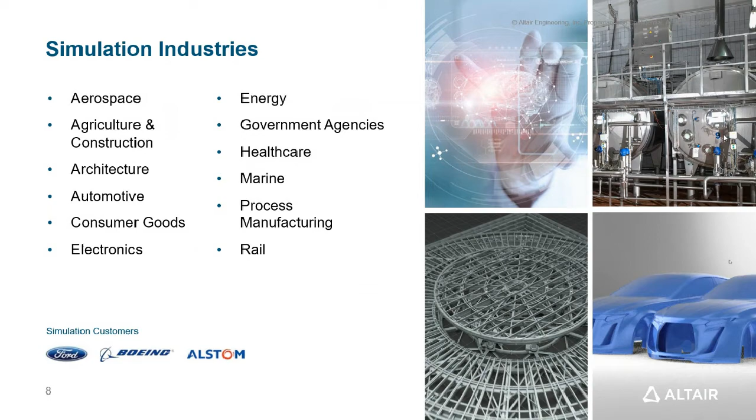In terms of the industries that we're in, again, aerospace, architecture, automotive, making full use of our software. And it means that whatever discipline you're interested in at university, there will be an industry out there that would be of interest to you. In terms of the applications, key ones here for you being structures, implicit and explicit, systems modeling, multi-physics, industrial design, fluids and thermal and electromagnetics may be key to some of the technologies you would wish to access.

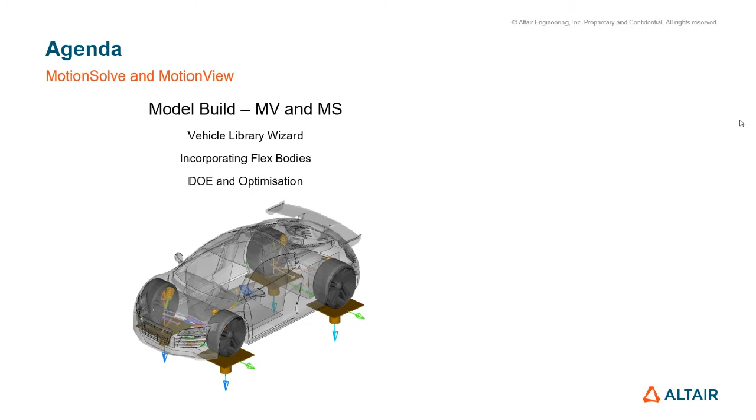So we'll do it in two parts. We'll go through the model build itself, using MotionView and MotionSolve, where I'll take you through the vehicle library wizard and flex bodies. And then I'll also take you through Inspire Motion, where you can do a rapid analysis of how you can connect all your different parts together, and then how you can take your multi-body dynamic analysis straight into a topology optimization. So how we can conduct an optimization based upon how our parts are being used.

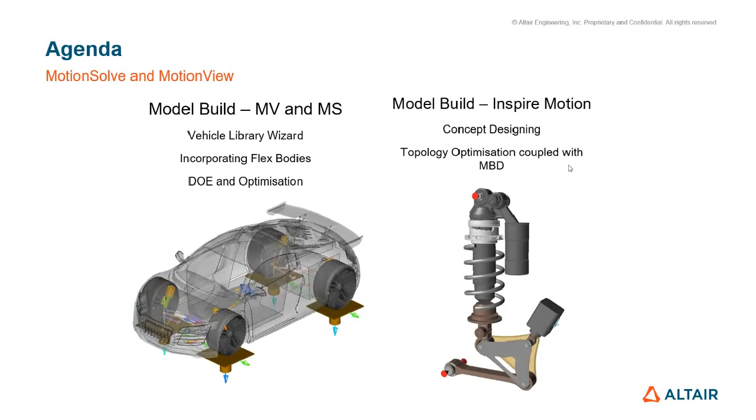I'm not too sure what everyone's CAE background is. Some of you might have used FEA before, some of you probably never encountered this before. So we'll go through exactly why it is that we should use MBD. Within CAE workflows, we have three main routes that you can go down. We can use simulation to emulate real life scenarios. This is where we understand how our product is being used, and we want to design for its intended purposes.

The second way is we can emulate physical tests. For example, if you're going to be producing a car that's roadworthy, we need to make sure that it's also crash-worthy. And in order to make sure that it fulfills these standards, it needs to be able to pass physical tests. So this is where we can start designing to make sure that we can replicate standardizations and the different testing procedures.

And finally, last but not least, at times where we don't really know how it's being used in real life, because maybe it's part of a huge assembly, or where we're not trying to replicate a physical test, this is when we can start looking at a multi-body dynamic analysis. MBD basically helps you look at mechanisms within your parts. So if you're looking at an assembly, you can do a mechanism-derived analysis, and you can also look at your part assembly performance.

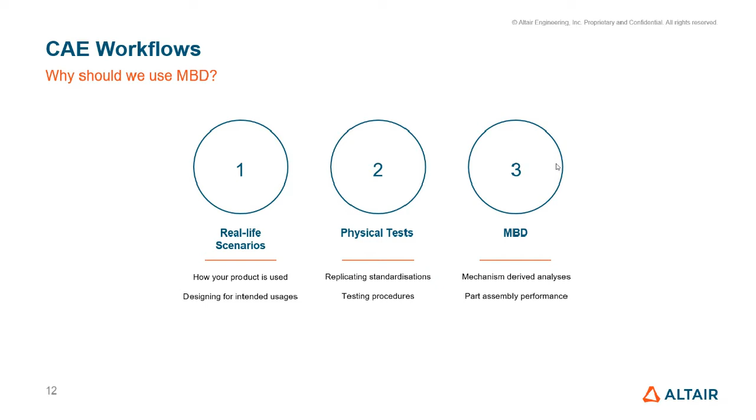If it's a standalone product, obviously you understand exactly how it's being used. But say if it's a lower control arm from a suspension system, you probably want to know exactly where the attachment points should be and the strength that it's undergoing when being used.

So just a little bit about the two products that I'll be introducing. Within the first demo, I take you through MotionView. MotionView is the preprocessor, the place where you would set your model up. It's the GUI which you would interact with and where you would bring your CAD in to work upon. The same with Inspire Motion. Inspire Motion is a second GUI that you can also work with, and based upon what you're looking at, you can choose whether you want to use MotionView or Inspire Motion.

Now, just because they're two different interfaces, it doesn't mean that they would solve differently. Because what's actually being run in the background is our solver called MotionSolve. You don't have any sort of interaction with it. It's the massive calculator in the background that does all of the simulation work for you, all the calculations after you've set it up.

Hence, even though they look slightly different, or Inspire Motion is slightly easier to use than MotionView, this by no means means the results you get are less accurate. It's just as accurate as our full-blown, complex MotionSolve solver that's used for MotionView setups as well.

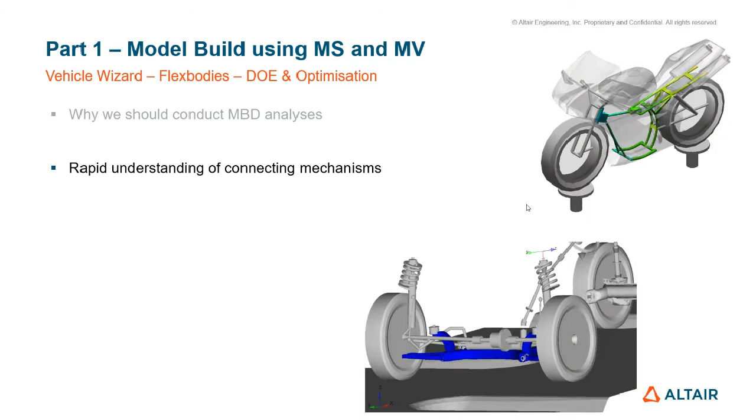So let's start with MotionView and MotionSolve. We've just discussed why we should conduct an MBD analysis. We will understand the connecting mechanisms of our different vehicles, so I'll walk you through the library wizard itself. How MotionView is different to our other products is that you can make it as simple as you like, but you can make it as complex as you need it to be as well.

So from simple to complex functionalities, either you can make it a simple model, or you can make it fully parametric, where if you were to change one value, all of your other model setup will update itself with respect to that change that you made within the parametric model.

For those of you who already use HyperMesh, you'll be able to see that there is a seamless transition between HyperMesh and MotionView, where you can take one mesh model and just bring it straight into MotionView. So this enables a really nice way for your FEA teams to work with your MBD teams, and there's an ease of organizing different system entities.

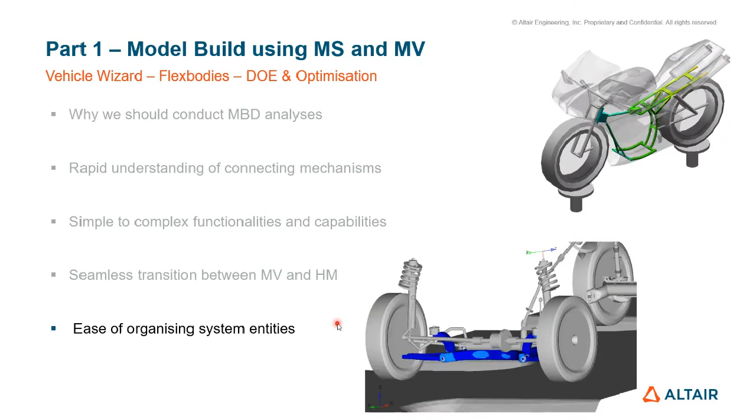So without further ado, I'm going to bring up my screen. Within this demo, what I'm going to do is show you exactly how you can access the assembly wizard, how you can build full vehicles, or maybe just the front end or the rear end of your vehicle, and then how you can take it through to specifying and understanding how all your joints work and the forces generated from them.

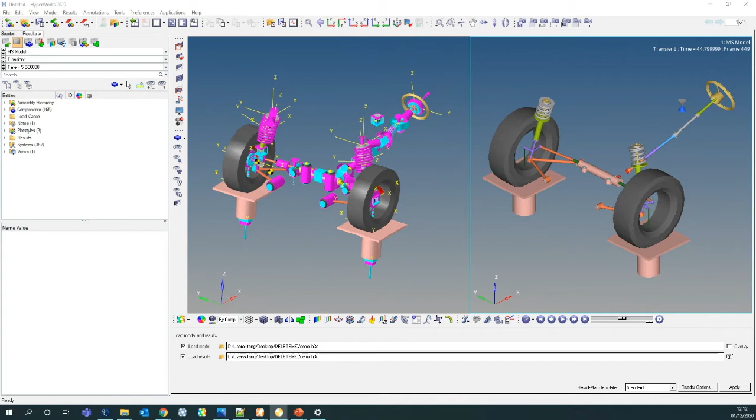So when you start up MotionView, you will see that it looks a bit like this. Let me pull the right window in. For those of you who already use HyperMesh, you'll see it's quite similar in that it's got the same sort of setup, and you have a project browser at the side here. You have another taskbar of your different options, and also you have your actual menu icons at the top.

Now, because it's multidisciplinary, you have lots of different options that you can load in. So either we can start looking at the attachment wizards, the assembly wizards, and any sort of library wizard that you need to access, you set it here. Just so you know, you aren't just tied to looking at vehicles. You can look at a small truck or a car, a heavy truck, or a two-wheeler. So if you're going to design for a bike, you can easily change your wizard library here. But for today's demo, we're going to just show you the assembly wizard.

So when you click on the assembly wizard, you'll see that you can specify a model type. Say we want to look at the front end of the vehicle, you can then specify the driveline configuration, whether it's a front or rear wheel drive. And then you can select your other primary systems, so the vehicle body, your front subframe, the suspension system itself, what kind of configuration you want it to be. There's 5 different options to choose from. And with steering linkages, you can specify a type and powertrain as well.

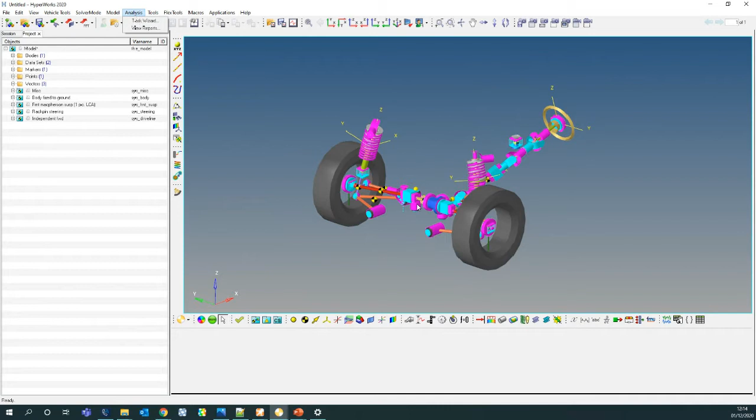Now, straight after this, either you can bring in your own CAD to replace different parts, or you can change the different hard point locations. And like we mentioned before about the well-organized system entities, you can use them from the project browser at the side. You can expand upon them and see which graphics and which bodies belong to which system. Within the suspension system, it refers to the knuckle, the lower control arm, the wheel, and the wheel hub.

And like we said, you can specify the mass and the inertial properties of these parts, exactly the way in which it would move, and the coordinates of it as well. Either you can make it follow a point that you're using, making it fully parametric, or you can enter in the values themselves.

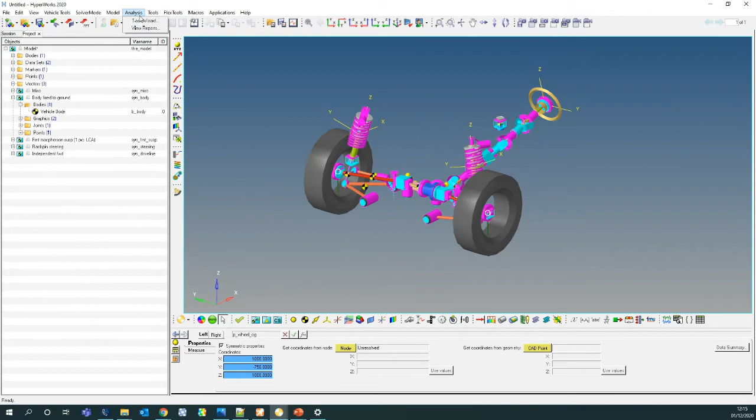Now, once we understand all the different systems that we're working with, you can then attach an analysis. Within MotionView, you have an analysis wizard with the default standard ones that you might want to look at based upon the model that you have loaded in. So you can start looking at a kinematics and compliance analysis, or a steering analysis.

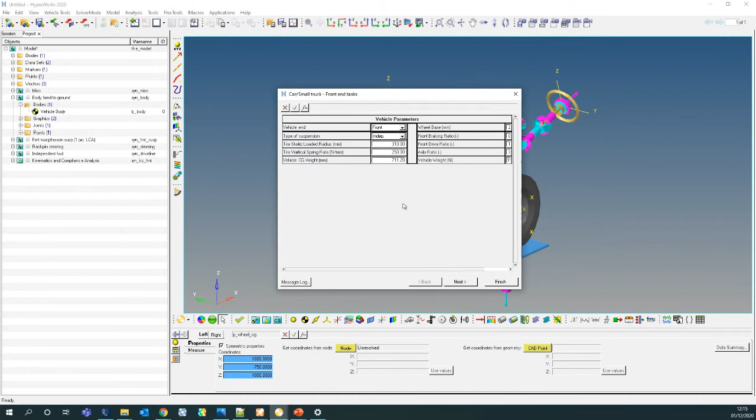What it really cleverly does is it understands where your different hard points are, and you can change your vehicle parameters for the test itself. You can go through and specify your test parameters as well, so the jounce travel and ride, the rebound travel, maximum longitudinal forces - you can change them all within this area.

You can see very quickly within MotionView it understands exactly where those points are and where to attach that test onto. So at this point, what you can do is click run, and I can then save it in the specific folder. So if I was to bring in and save it here, we can call this demo 2 and just click run.

Like with every solver, it will then tell you exactly what's going on, how far it is within the solve, and within a few seconds you can very quickly see the results of this setup. So let's let that run in the background.

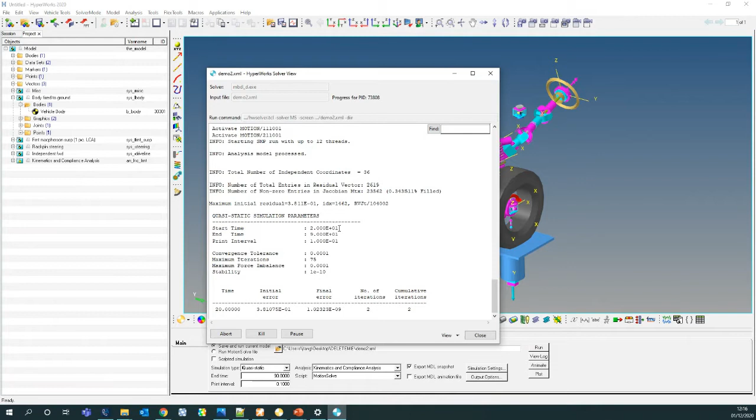Now, if I can start another one to show you, you're not just tied down to looking at the front end of the vehicle. What you can always do is start looking at full vehicles as well. So say if I go into the analysis or the model assembly wizard, we can start looking at integrating a full vehicle with a driver, or you can specify that driveline configuration. For now, I'll leave everything as default, but obviously you can go through and select a driver system as well.

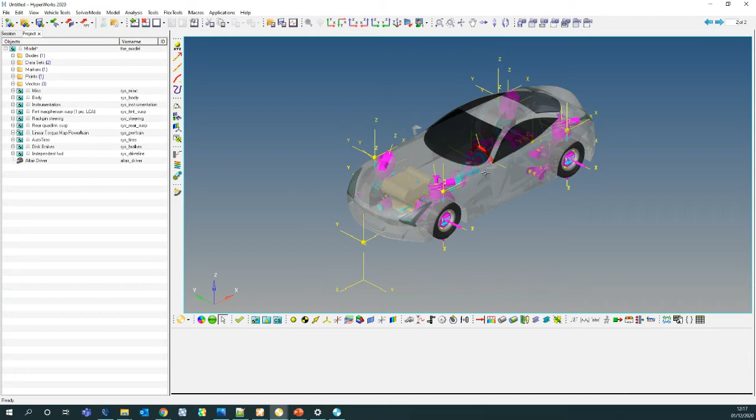And the driver system is awesome because say if you wanted to understand the amount of power or the torque required to go through a certain road in a double lane change, you can easily specify that driver to overcome all of those different parameters.

So you can see here we have a vehicle, and very quickly I can attach another analysis to it, and you can add a different event. So in this term, I can do a double lane change, click OK, and you can see it map out a road for this vehicle to follow.

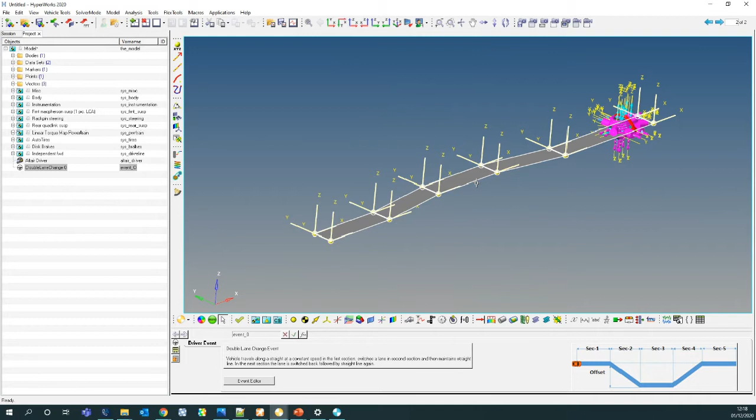Once we have this set up, you can then go through and change your different vehicle parameters to make it more applicable to your vehicle itself. You can change the shell, the CAD, so any sort of CAD graphics that we already have - you can easily click on them and replace it with your own graphics as well. These will be the points where you go through and you can make it refer to a different CAD graphic that you're looking at.

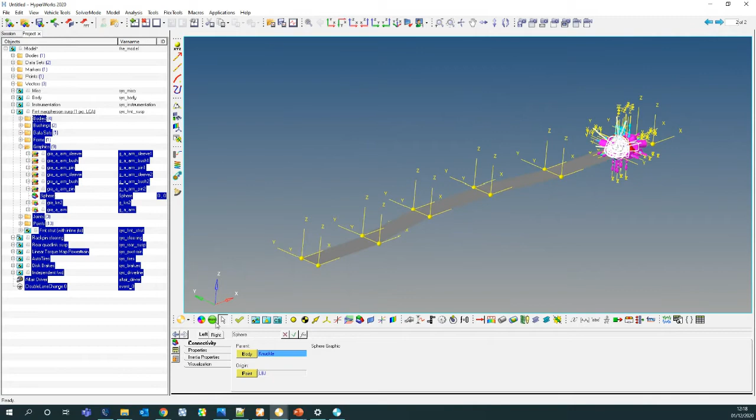So like we said, if I just run this in the background, I can call this car, and let's run it. Now if I can refer back to my previous model, this one's probably solved now - you see it's completed. So what I'm going to do is click animate.

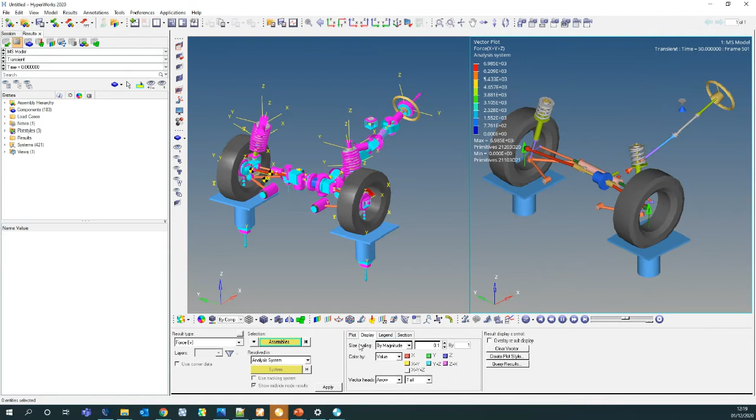And very quickly, you can then do the post-processing on the other side of the screen. If you were to click play, we can go through and specify the forces that we get from the different assemblies. And if we were to change the display, so if we did it by magnitude - there we go. We can see the forces that the car will go through throughout its whole time in travel.

And then the same can be done for this one again, where you can click on animate, and throughout this section, you can see exactly the behaviours in which this car would have to undergo in order to do a double lane change. And obviously through here, you can get all the results you need.

Now, what's really nice is that built into Motion View and MotionSolve is the fact that you always get these reports with it. So with every sort of standard analysis, you can specify it to output the same set of results each time through a report template. So for instance, if I were to head back into this analysis, just by going into View Reports, you can see anything that you solve gets brought up here.

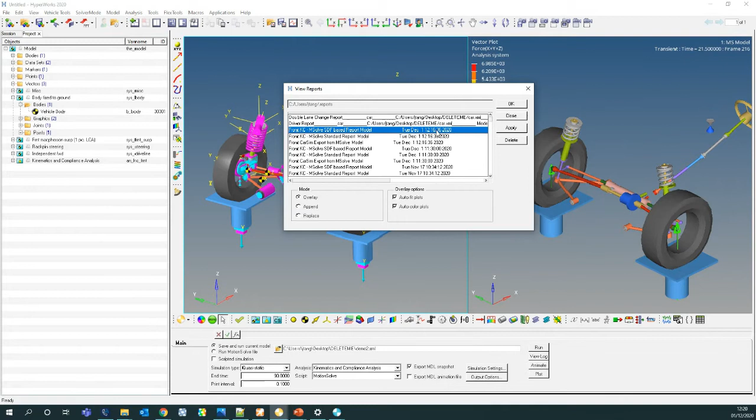Based upon that analysis at 12:16, I can click to load up the standard results, click OK, and you'll see that it brings in all the different viewpoints of the vehicle you might want to focus upon, and also generates all the different graphs for you. Let's give this a second to load, and we can do the same with our car as well.

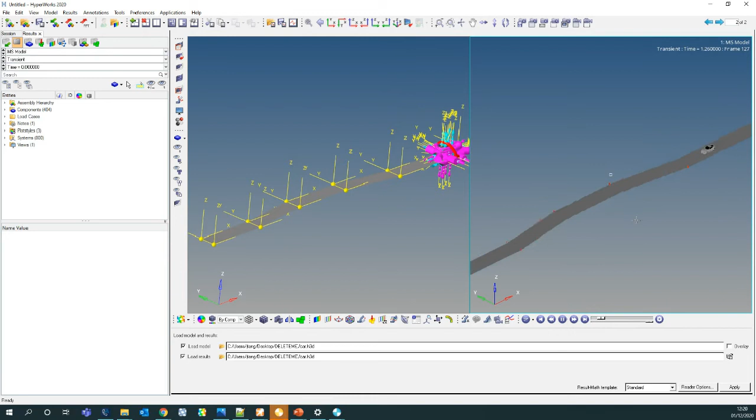Here you can see the car's coming to the end of a double lane change. Say if you wanted to understand the camber or the behaviour of certain aspects in your vehicle, very simply go to analysis, view reports, and we can bring up the double lane change report. If I click OK, now you can see from this K and C analysis, we can go through and look at all of the different graphs.

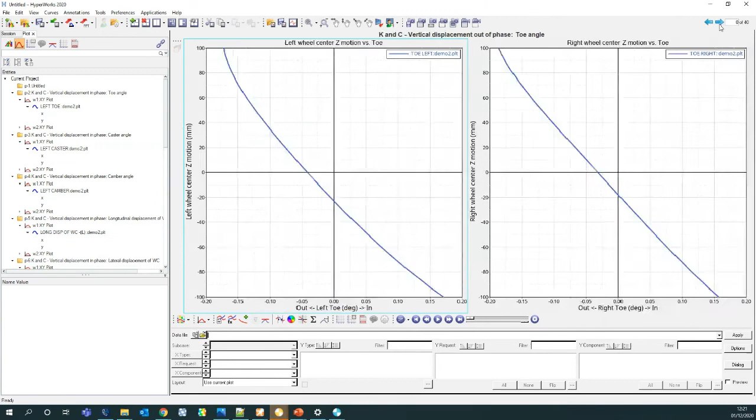You can look at the left wheel center motion versus toe, the vertical displacement in the phase, the toe angle, caster angle, camber angle. You can go through all of this and it will give you everything you need. You can also look at exactly how you might want to optimize it to improve its performance and go through all of it here.

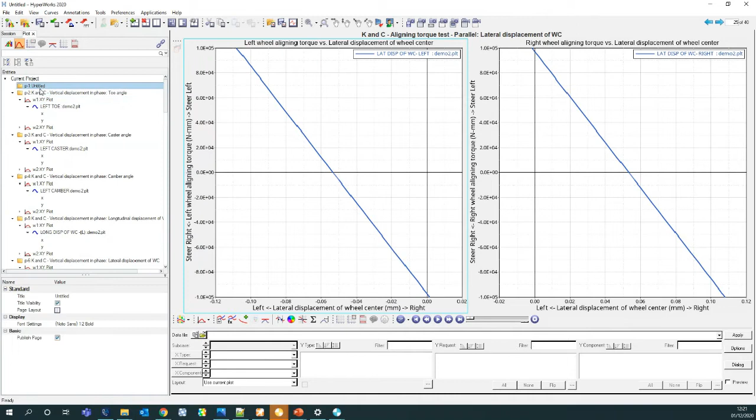Now, once you want to start looking at flex bodies - flex bodies are different to what we would use in Motion View, since Motion View assumes everything's rigid, meaning it won't deform when being used. You would then start incorporating flex bodies into these different parts if you know the force will change because your part will undergo significant deformation. That's when we want to start incorporating flex bodies.

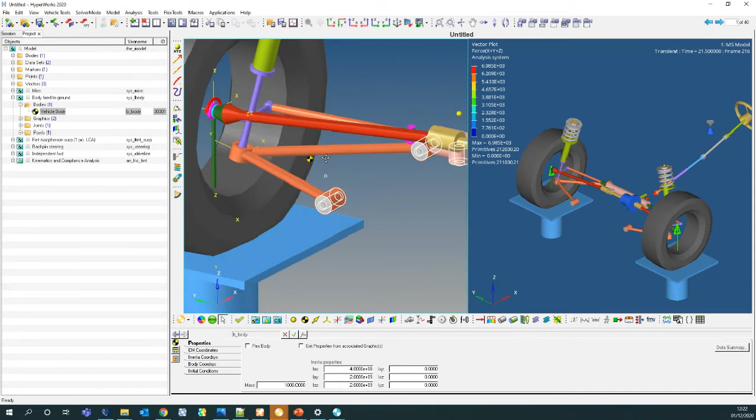Very easily, you can click on flex body and just bring it in. There's lots of tutorials to show you how to do a flex prep. It's very easy to use.

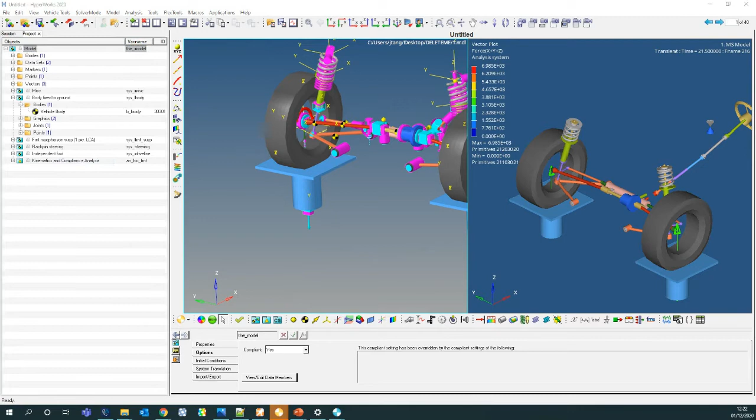One more thing I wanted to show you is that for anything you're looking at, if you right click in model, you also get the optimization wizard. Let me just save this first. If I save this as a model, I should be able to show you how you can use the optimization wizard.

With the optimization wizard, if you wanted to change the hard point of your suspension systems, you can go through and specify exactly what it is you want to change. You can do all of these and just click add. Obviously if they're parametric, you have to make sure they're not parametric, but this is where you can go through to specify what it is you want to change.

You can look at the nominal values, so where it's currently sat at, and optimize it for different values. You can optimize based upon its performance and take it through for an optimization itself. There's another tutorial online for this, which you can easily refer to.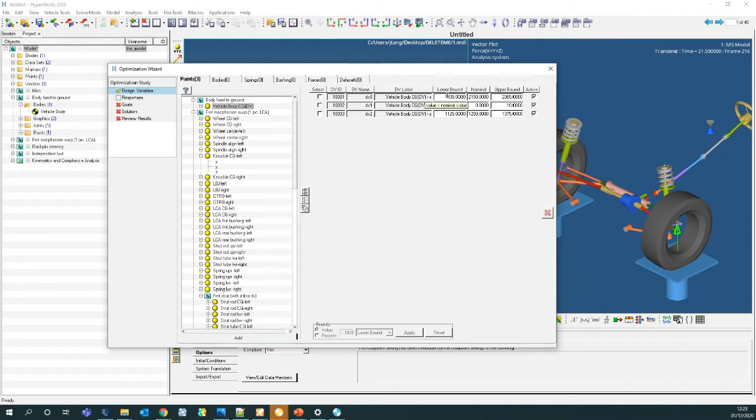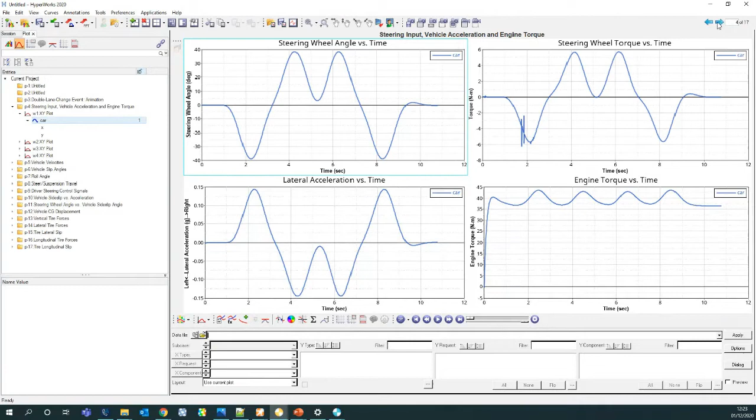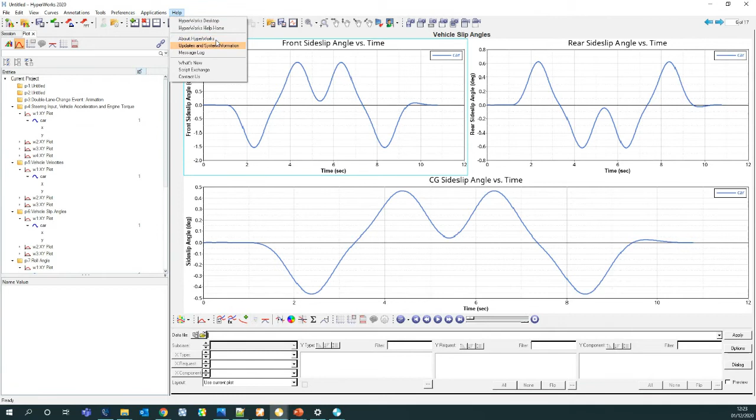But yes, this is Motion View. In a nutshell, I've only covered just a few of the many complex functionalities it can do, but do give this a go. There's lots of tutorials online - if you go to help and go to help home, there's lots of tutorials in there which will show you exactly how you can go through and use this tool to design your FS vehicle.

So if I can head back into my slides.

But obviously with MotionSolve itself, it's capable of creating fully parametric models. This is where you want to use MotionSolve if you want to look at full vehicles and specialize on using flex bodies - then this is when you want to use Motion View. You can use it to predict your dynamic and kinematic responses.

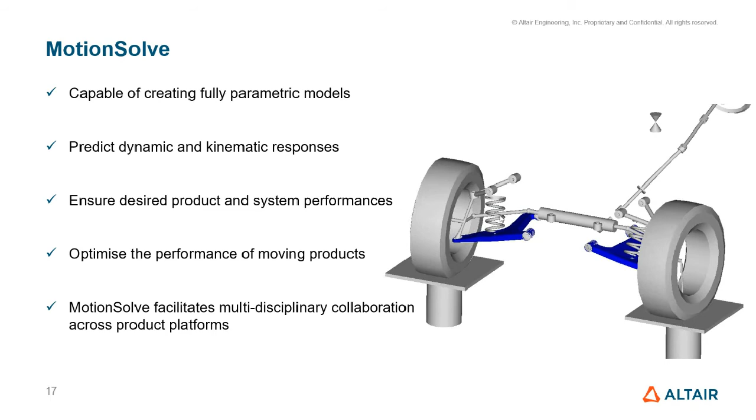You can ensure that your desired product and system performances are met using the optimization wizard, and with the optimization wizard you would optimize the performance of your moving products. MotionSolve itself also facilitates multidisciplinary collaboration across product platforms - so say if you wanted to couple this solver up to your CFD as well, you can easily do that with all of our suite of tools.

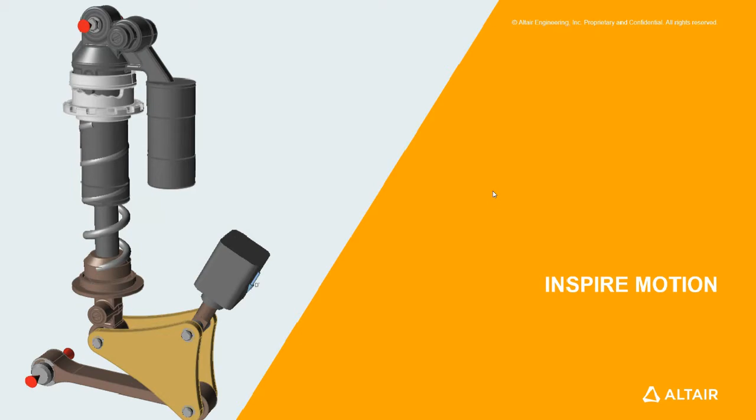Now for the next few minutes, I'm going to show you Inspire Motion. This is a tutorial you can do online as well. I've recorded a video for all of the students that you can follow, and if you go to Altair University, you can also conduct this tutorial yourself.

So we also have another tool called Inspire Motion. Why would you want to use it? Compared to MotionView, which I fully appreciate as a full-blown MBD solver, there might be other tools you might not be using, so it's quite complex.

Inspire Motion is super user-friendly. It shows you a really nice workflow, and if you just wanted a very quick understanding of your connecting parts, you can obtain it very quickly here using Inspire Motion. It's an all-in-one GUI, so your model setup, solving, and results viewing all happen in the same place.

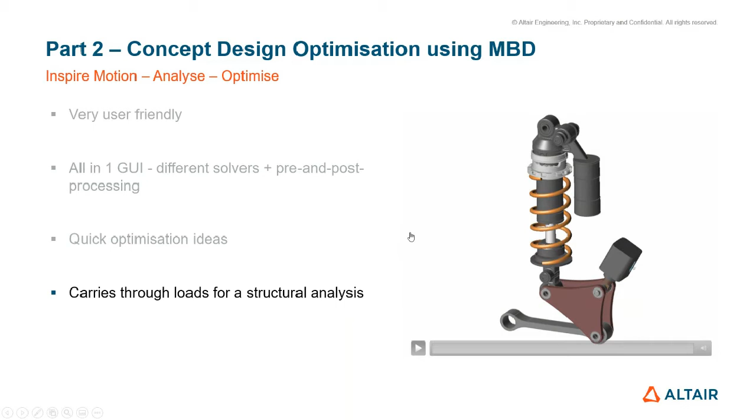It gives you very quick optimization ideas, so if you want to optimize it based upon how it's being used, you can do that. And you can easily carry it through for a structural analysis—any sort of MBD analysis you have, you can take straight through for FEA from the generated loads that you get.

It is a simplified version of MotionView, so you can't do flex bodies—everything in Inspire Motion is assumed to be rigid. But what you can do is export decks from Inspire Motion to use within MotionView if you want to take it from a simple analysis to a more complex one.

So if I can just show you this quick video on screen, I'll show exactly how you can create this motorcycle suspension part—you can see its optimized design after having done dynamic analysis, and then you can validate it for its final design and strength validation.

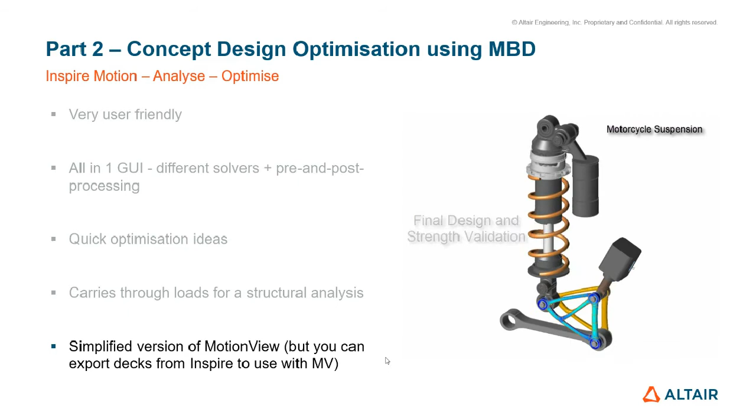So very quickly, let me just show you that this is the final design. With the Force Explorer tools, you can see all of the forces generated from the actual animation. Now the way you would go to set it up is very quick and simple, and I'll show you exactly within the next few minutes.

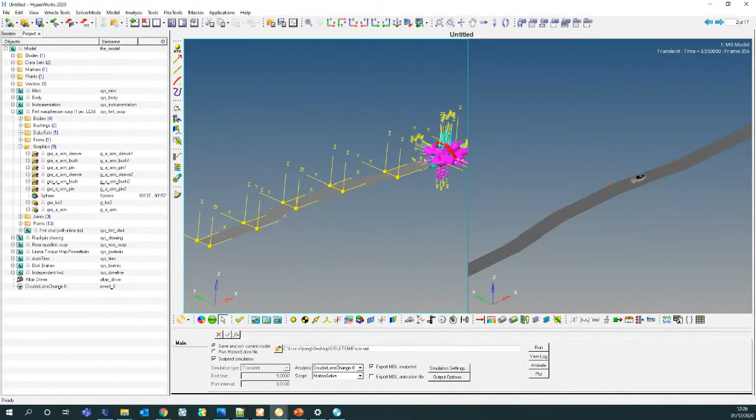So you'll see within Inspire Motion, it looks fairly different to MotionView. Let me just make sure I have the right screen up. Here we go—within Inspire, we work from a left to right workflow. Same again, we have our menu tools at the very top where you can look at geometry, structure, motion.

So if you wanted to edit any sort of the geometry very quickly, these are some very good tools here that you can use. But within Motion, you can see from left to right would be the flow in which we would recommend you to use.

So easily, if you have any sort of CAD part, I can drag and drop the CAD straight into Inspire to open it up. Then through this aspect itself, you can see exactly what you're working with, how many parts you have, and it'll show everything here.

You can also tell it to calculate the mass of each part to see what you're working with, and if you're in the right unit. Just note that there's an internal units converter down at the bottom right corner where you can change it to what you want to work in.

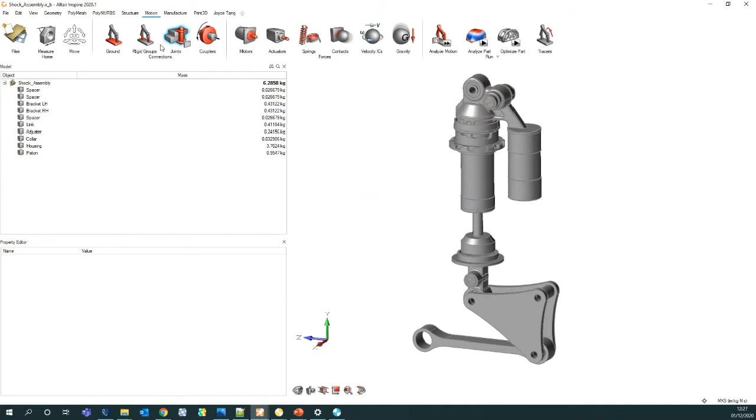So the first thing I'm going to do is start looking at connecting up rigid groups. Rigid groups are basically the parts that will move relative to one another, and from a left to right workflow, it tells you to start with grounding different parts, putting them into rigid groups.

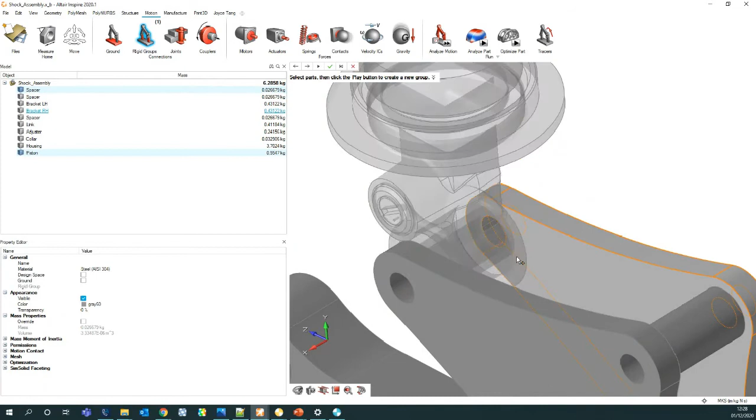So let me create rigid group 1 here, and we'll see that this piston also works and moves relative to the spacer. I can create a rigid group there, and do the same with this part and that spacer. So what we're telling it is, with rigid groups, this is how they're all connected up—we know this part will move relative to that spacer on the inside, as well as the other parts, so these three different parts will move as one unit.

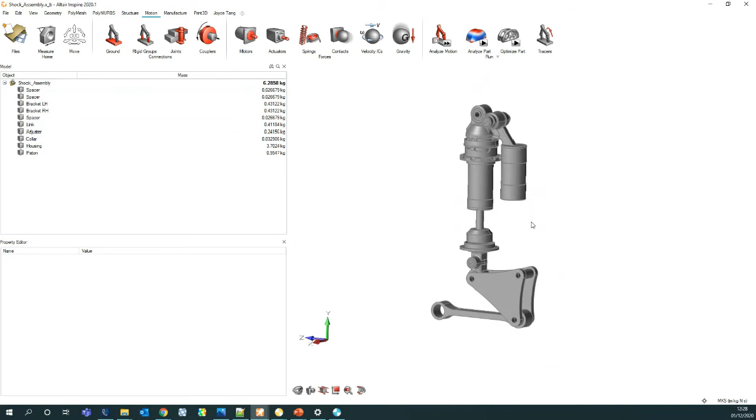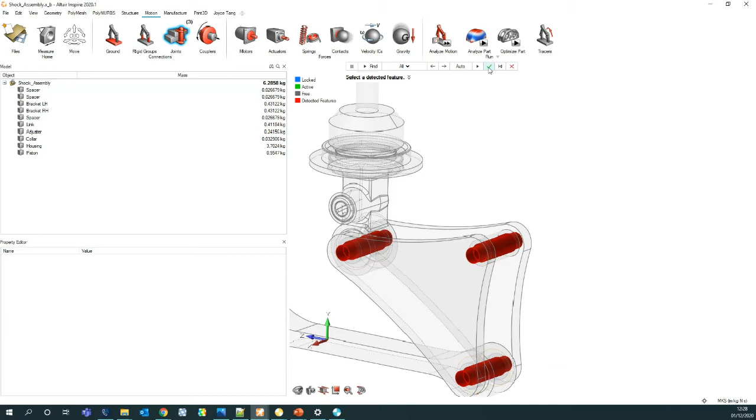Now once we've done that, it will then tell you to put in some joints. Joints dictate how the different parts move relative to one another. Between these three parts here, the spacer and the two brackets at the side, it's detected aligned holes, and we can put a pin joint through them, because that's how they're connected up. We can also start telling it to look at cylindrical pairs as well.

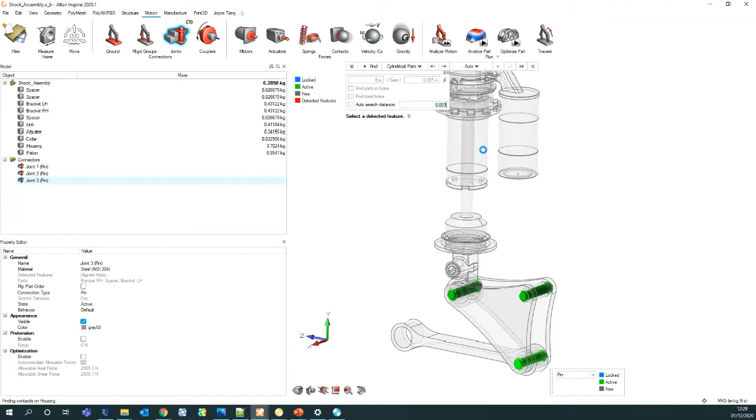So we can tell it to search for itself. So if we do, so we can change the auto search distance as well to look for different connections. And you can see it's picked up a cylindrical joint between these two. So we will know for a fact that this shaft here will move in the vertical, in and out of this piston here in a cylindrical manner using a cylindrical joint.

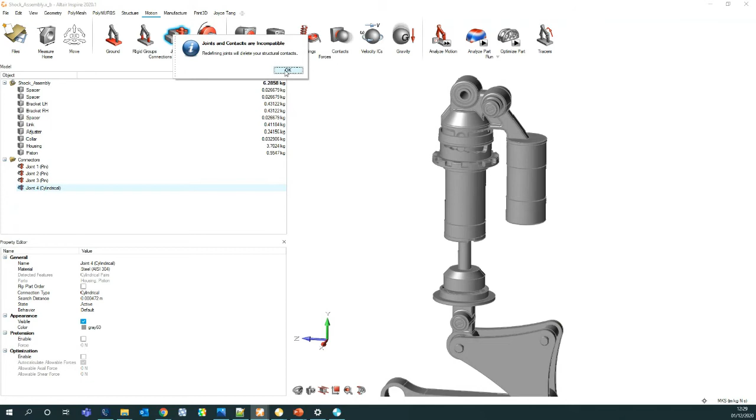And last but not least, what you can also do is start looking at the single holes. So where we have single holes, this is also where we want to hold it in its design space. So that's where we put a grounded pin because they're free to rotate around that part, but they're not free to translate anywhere else. Hence why our model will be grounded through that aspect there.

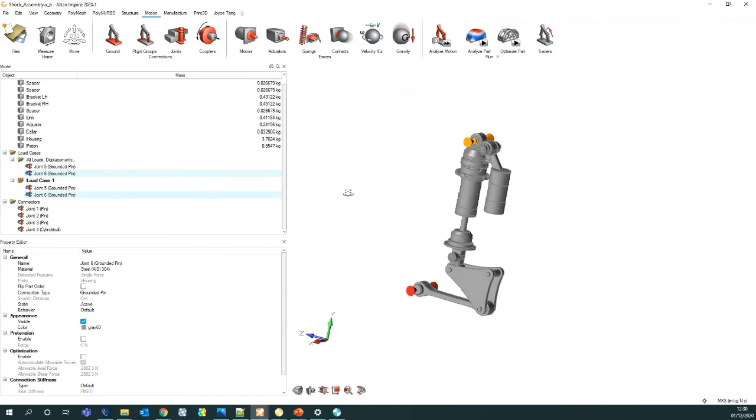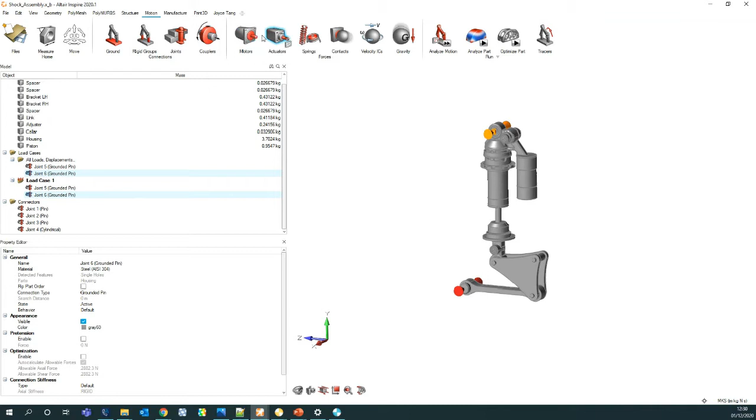So once we have all of these defined, we can then take it through and specify exactly how it's going to be moved. So obviously you can put on any sort of couplers where the rotation and translation of parts are moving relative to a ratio between one another. You can add in a motor. So if you want to apply any sort of rotational movement, actuators would be what we'll be applying here.

So an actuator is different to a motor in that actuators implement a translational movement, whilst motors implement a rotational movement. So with this actuator here, I'm going to apply it at the end of this part here. You can see very quickly that you can then give this actuator all of its different properties. And say if I was to move this upwards in that manner, either I can tell it to drive it using displacement, velocity, acceleration, or force, and you can then dictate the motion which you drive that force to.

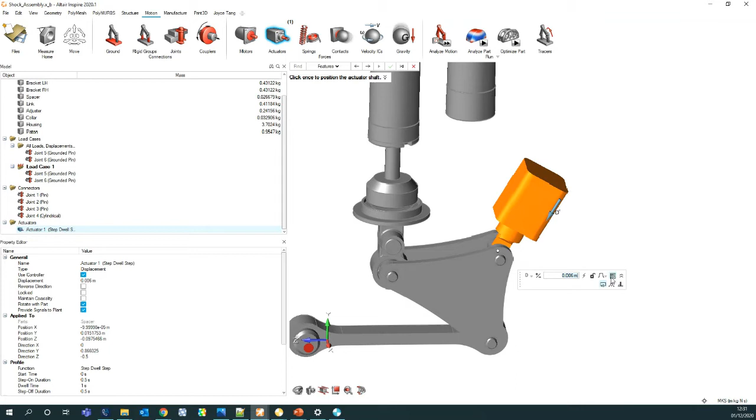So either you can start looking at a ramp function or step function, or maybe a sinusoidal manner as well. But say if you have tabulated data, you can always bring in tabulated data in this manner. So if I go on to this area and bring in some data, you can see I brought that all in. Now I can easily change it to millimeters just to see if it makes sense, and you can see we're telling it to move at 13 mils, which all makes sense. And obviously you have the tabulated data for how long it goes on for.

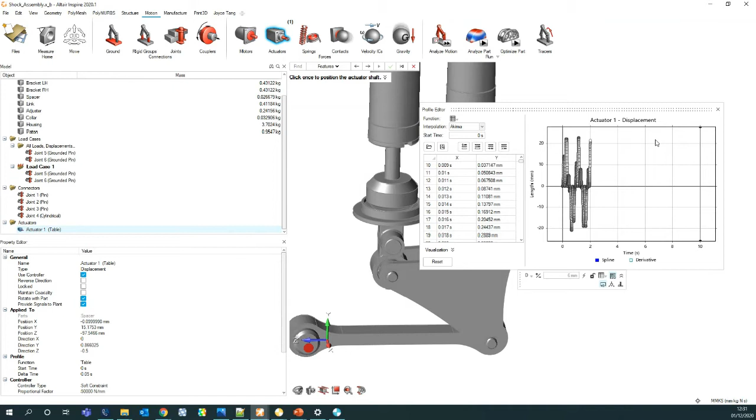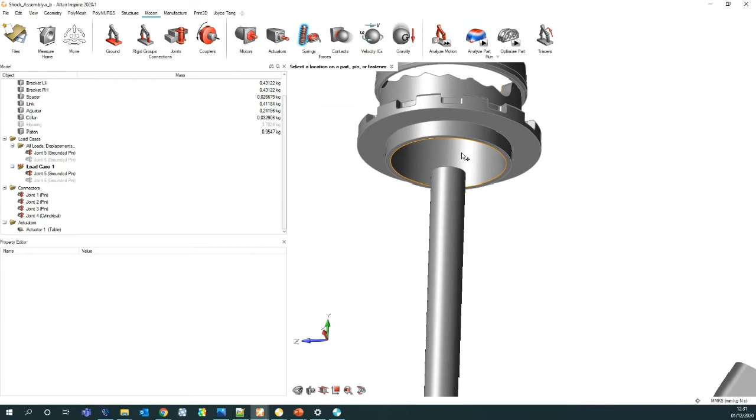We can then also start specifying a spring. So if I wanted to hide off this part, you'll see that within Inspire, it's really nice in that it's got a geometry feature recognition tool, where if you were to hover over any sort of parts, it will show you where the center points of those parts are. So you don't need to go back into CAD to specify where the center points are. We can easily specify the center point of that to being connected to the center point of here.

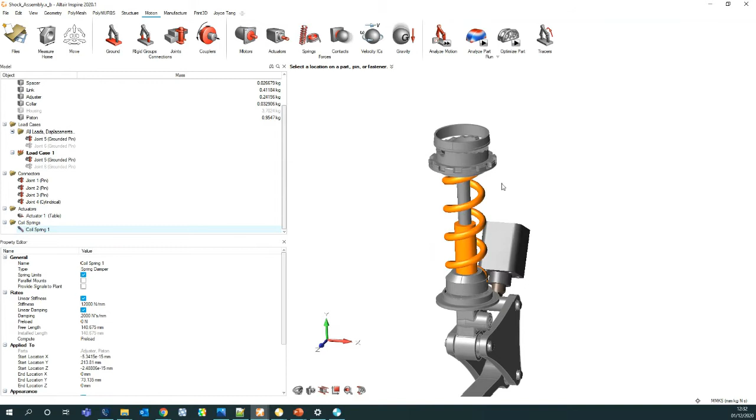And then obviously we can go through and specify any sort of spring properties. So we can tell that to be 12,000 in terms of stiffness. The damper itself, we can make it 2,000. And then we'll bring everything back. Obviously, we need to make sure that gravity is moving in the right direction. And if you did want to specify contact or any sort of initial conditions of velocity, you can do that as well. Now, with analyzing motion, I can specify 2 seconds, and the output rate would be the amount of data you want per second. We'll just keep it to 30 for now.

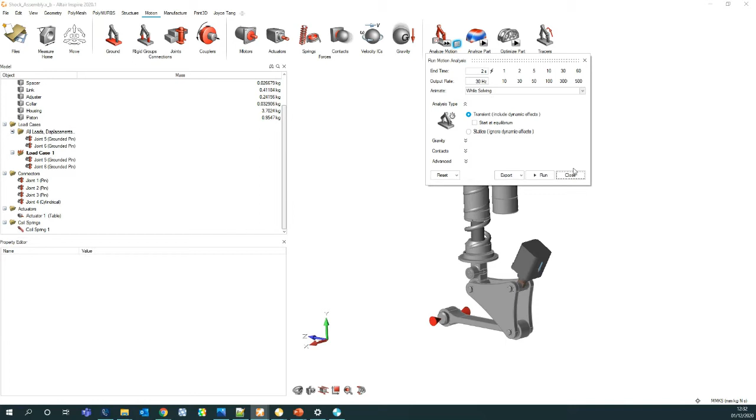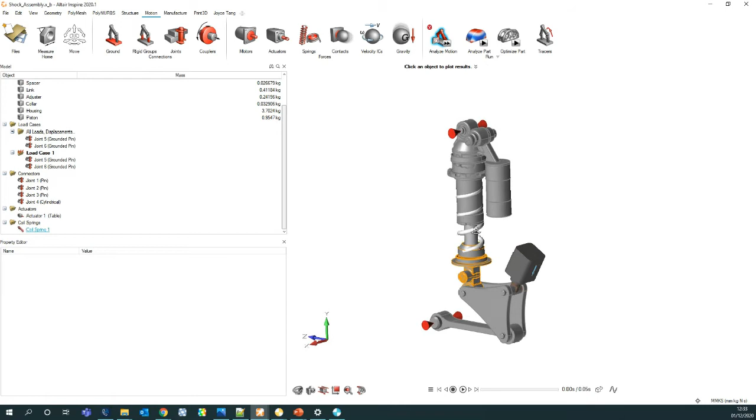And very quickly, I always make sure that it's telling me to animate while solving, because if it's going to fail, at least I know it fails immediately. But then if I was to run it, you can see it solving in live time, and you'll see that I forgot to specify a very important part to maintain coaxiality around my actuator. But now that that's set, we'll be able to see that the part can solve itself quickly. So I've probably just specified something incorrectly in my joints here, but with the same setup, you should be able to see that it will just run the same way as this aspect.

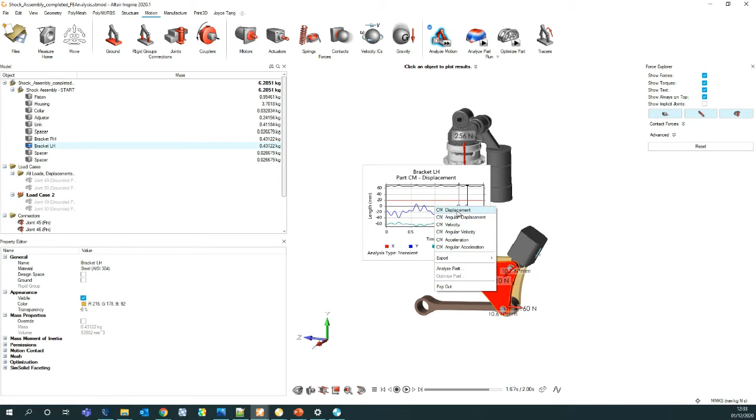And like we said, after you've run all of this, if you were to click on any of your parts, you can very quickly right-click and look at the differences between the results that you get. So you can look at the part displacement, the velocity, and the acceleration. Within your joints, you can see the maximum joint forces. But what's really nice is that if you were to right-click on any of these graphs, you can just take it through to analyze. And you can analyze the part, or you can optimize it.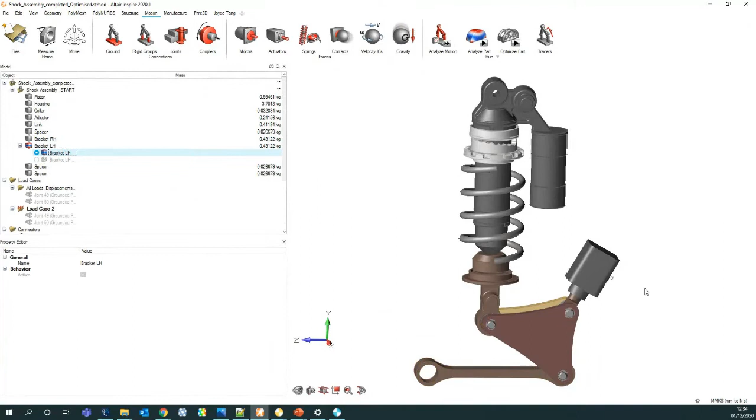And it'll only take a few minutes to run. You don't need to do any of the meshing yourself. It'll automatically do a mesh for you. But what you will get at the end of it would be, say if you conducted an FEA analysis, we'll be able to see the stress contours on it in this manner.

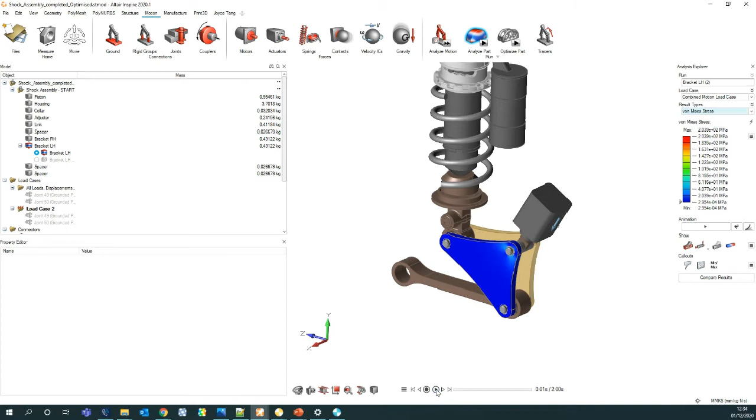And then obviously if you conduct an optimization, you'll then also be able to see how it optimizes. So if I was to look at the stresses on this part itself, or let's look at the von Mises stresses. And if you were to click play, you can see exactly how your stresses will vary throughout the animation itself. And then to take it one step further, if you were to optimize it, you can see after you've optimized it, it will show you exactly where you can take material out of your part in this manner.

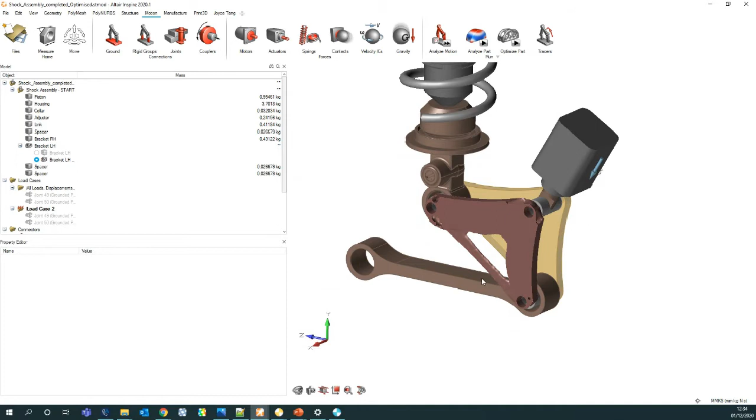So if you did want to follow this tutorial on Altair University, you can download the model and you can go through the walkthrough of the mock-up and how to put this whole model together. And yeah, do give it a go. It's super easy to use and it's very user-friendly. If I can just get back to my slides now.

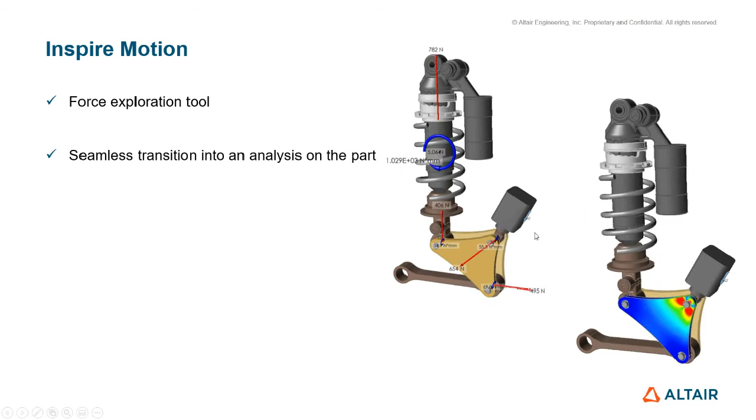So within Inspire Motion, obviously you have the force exploration tool. That's what you would use to look at the torques and the forces required to go through it. Like we could see, there's a seamless transition into analysis on the part. So to take it through from conducting the MBD analysis to looking at FEA. And then consequently after that, you can conduct optimizations on it. So you can see that the setup was all done for you.

The optimizations that you can do can vary from topology to gauge. So you're not limited in any sort of optimization methods. You can do a thickness optimization, or you can look at topology to look at the stress load path, and it takes it all through for you. So you don't need to go through and set up the model countless numbers of times. You can conduct a topology optimization that's been derived from a multi-body dynamic analysis.

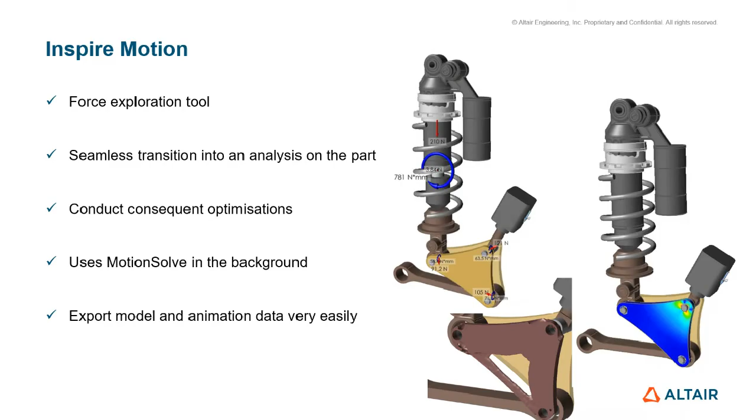It uses MotionSolve in the background. So like we said, just because it's so much easier to use, by no means does it mean that it's less accurate. It's just as accurate as it would be if you were to use MotionView. And you can also export model and animation data very easily. So if I just bring up that screen very quickly, at the bottom down here, with these settings, you can see you have a record button where you can record animations, and you can either export it as an MP4 or as a GIF.

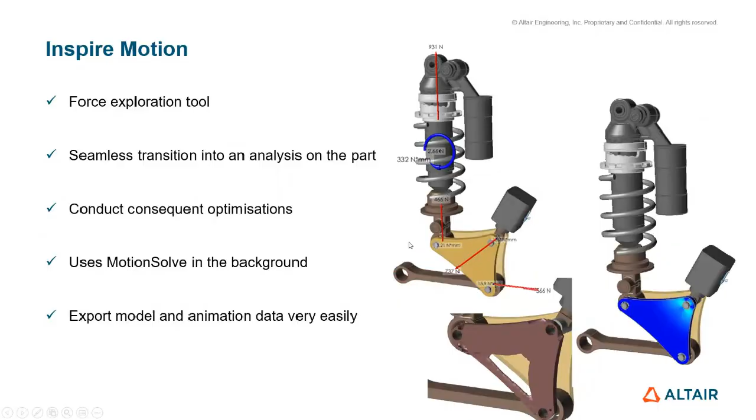So yeah, let me pass this back to Andreas, who will then take you through the sponsorship details. Thank you, Joyce. That was amazing. Thank you for showing everyone how to run through a multi-body analysis in MotionView and Inspire Motion with MotionSolve. So now I'm just going to run a little bit through the Altair sponsorship and what we can offer you.

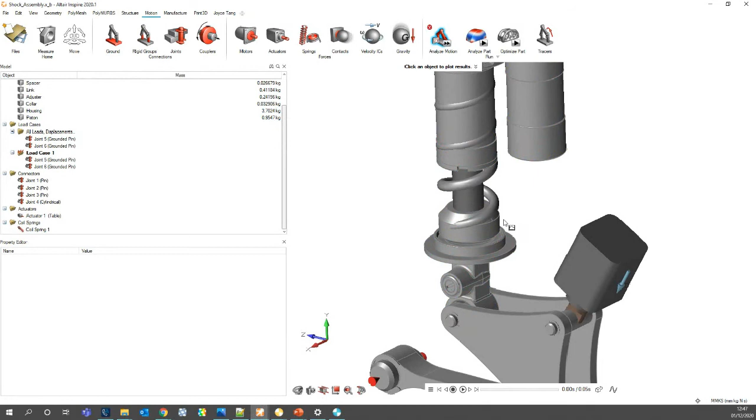Another question that we have: please can you explain again how we apply springs or other parts? Yes, so in terms of the thing that I just did, if I bring this model back up, when you attach your different parts, it's just running through and seeing exactly how you can attach it. Like I said, within Inspire Motion, it's got a geometry feature recognition tool. So say if you want to create a spring, you can either create it where it's just a spring itself or a spring and damper system.

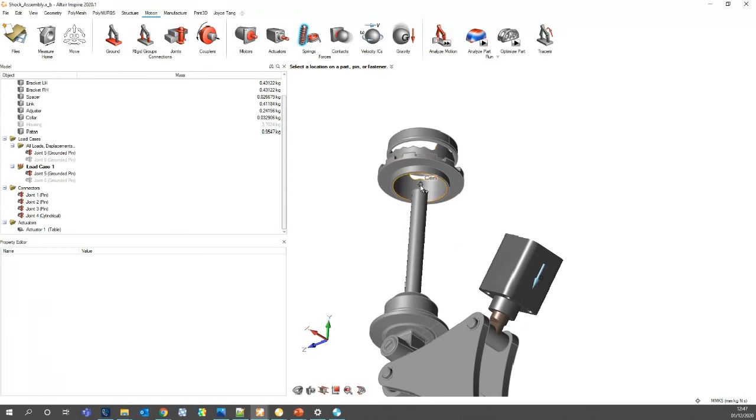And if you just hover over different aspects, you can see if the center pops up for this circle here, then you know it's the center of that surface, and you can attach it to the center of this one. And then straight after that, within the micro dialog box, you can specify your spring damper coefficients. So you can give it a spring stiffness or the damper stiffness, and you can set it up this way.

Another question, how to obtain an educational license. So it depends which one you want. If you want the student version, you can easily access Altair University. Within Altair University, as long as you register with your academic email address, you can obtain a student version outside of the UK. So you're welcome to try that. And if you are interested in using us as a teaching package, just contact your local Altair office and they'll talk to you about the educational side.

Another question here. Is it possible to insert suspension data from data acquisition systems in a CSV format in order to compare theoretical versus actual data? Yes, you can. When you insert data acquisition data in a CSV format within the results, you can see the actual result versus the desired result, and the differences between the two graphs, which you can then look at, using the optimization wizard to make it perform the way you would expect it to.

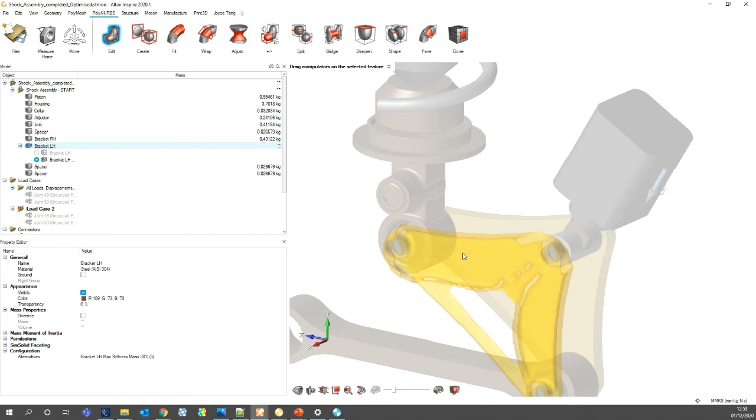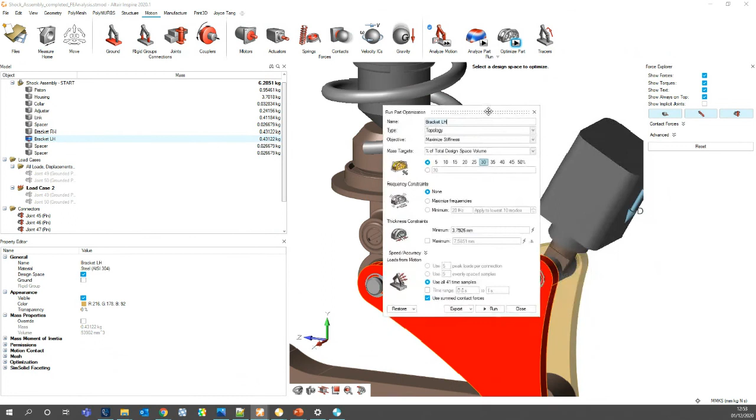So obviously based upon the optimization that you do, if I can show you the optimization options that you have, when you have something that's been analyzed, and say if we want to take it through for an optimization, based upon what it is you're trying to achieve, are you looking at maximizing stiffness, minimizing mass, maximizing the frequency? These are all of the different objectives that you can go through, and the optimization type you can also change.

So if we're looking at a topology optimization, what we want to do is understand where our main stress load paths are, so which part of our designs are used most, and where our redundant material is. Where there's no stresses touching, it effectively means that we don't really need material there. So that's where we take material out of it, while still stiffening that part up, and you can give it a mass target. So that's how it's intended to be used, where you can improve from its original geometry. You can make it lighter and perform even better than it was before.

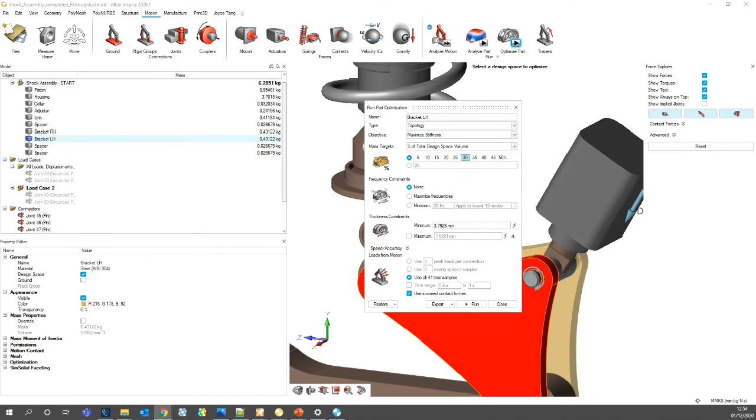I have another question here. So can we analyze different types of suspension systems like a double wishbone suspension system? Yes, you can. So like I showed within MotionView, within that assembly wizard itself, you can specify the different types of systems that you want to use for your suspension systems. So you can specify if it's just using front struts or with a stabilizer bar. You can there, yet again, look at a double wishbone suspension system, should you like.

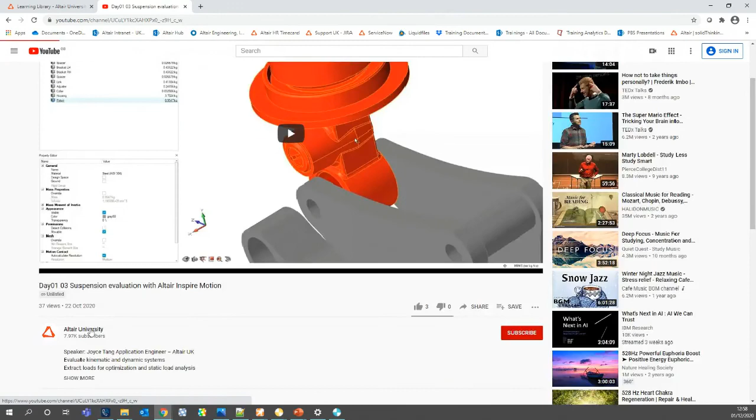And if we go onto the Altair University YouTube page, so give us 1 second. That is, again, just a way of accessing more of the videos as well in one neat area. So we'll just head on to the YouTube page. Here we go. So go to the videos. We can see here that we've got plenty of SimSolid videos, using Inspire Studio for design, optimization.

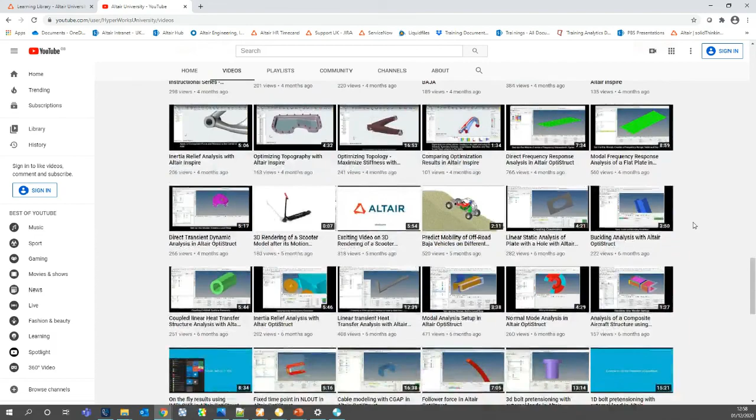If we keep on going, we'll start to find some more complex things. So there's hour-long videos on composite optimization of a Formula Student chassis. That's one of the videos in there. Quite detailed analysis of using motion for a Baja vehicle, for example. So there's plenty of competitions that we're part of.

And all this information, all these resources are available online for you to pick up the software as quickly as possible. We know it's a challenge to learn something new and to learn a new set of software and to move away from another one. So we want to make sure that it's as easy as possible for you to pick up the tools. So please head over to the Altair University website and the YouTube page to give you that helping hand to pick up the software as quickly as possible.

Certainly I believe it's helped out a few of the teams that we're sponsoring. Examples: Brookes, Team Bath Racing, Surrey, Manchester, all using these applications to help them pick up the software as quickly as possible, and they have now adopted it. It's nice to see Team Bath Racing picking up MotionSolve for their analysis. We've got Surrey picking up CFD and MotionSolve too, as new users of the tools over the past couple of years. So just a testament to what you can access online and how it can help you pick up the tools as quickly as possible.

Okay, so we have one last question to close off. Someone is designing an autonomous wheelchair. Can the software be useful here? Absolutely. It depends on which aspect of the autonomous wheelchair you want to design. If it's looking at the system performance of it, you can use Activate and Compose to dictate exactly how it should behave when detecting obstructions in front of it.